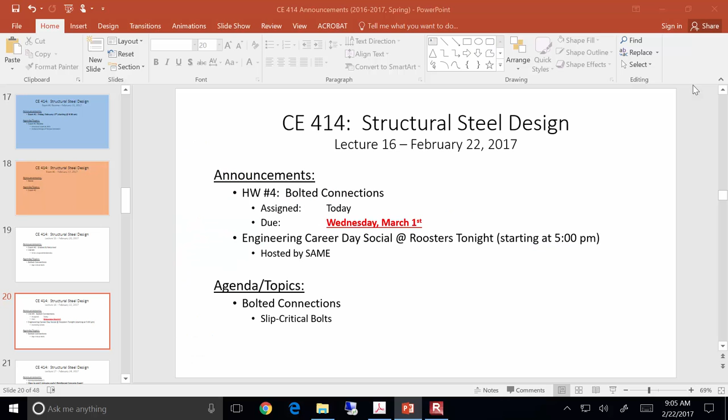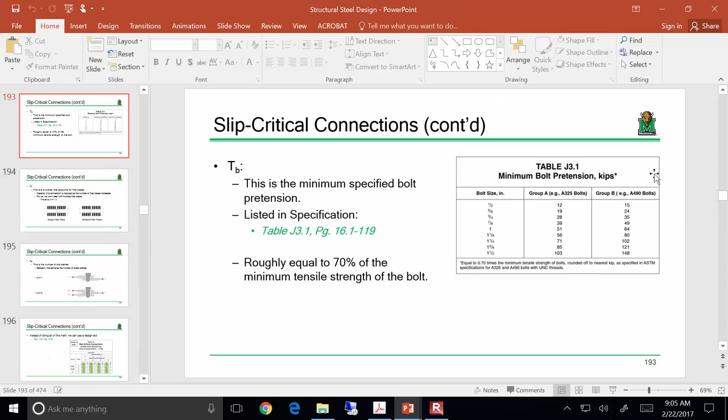All right. So there's 3 problems. One thing I will point out, we're going to do a slip critical design today, but we are not going to lay out the connection or analyze bolt bearing, because we've already done that. I'm not going to do the same thing like 3 times. So we're literally just going to do this slip critical design example very quickly, and then we'll move on from it. But let me go back to the notes, because there's a couple things I want to review before I pull up the homework assignment and get everybody acclimated back to what we were talking about.

So first thing, I'm going to hop back and forth a little bit, but I just want to bring it back to the topic at hand. We're talking about the slip critical capacity of bolts. We discussed that our nominal capacity is computed as follows. We have essentially our coefficient of static friction multiplied by our normal force. In this case, our coefficient of static friction is mu, and our normal force is T sub B. We take those 2 quantities, multiply them together, but then we adjust them by a number of different factors.

D sub U is our multiplier to account for the difference between the pretension that we're specifying versus the pretension we actually get in the field. And the fact is we get way more in the field, so much more that we can actually up our design capacity by about 13%. H sub F is our filler plate factor, and in essentially all cases we're going to do in this class, we're just going to take H sub F to equal 1, and N sub S is the number of slip planes.

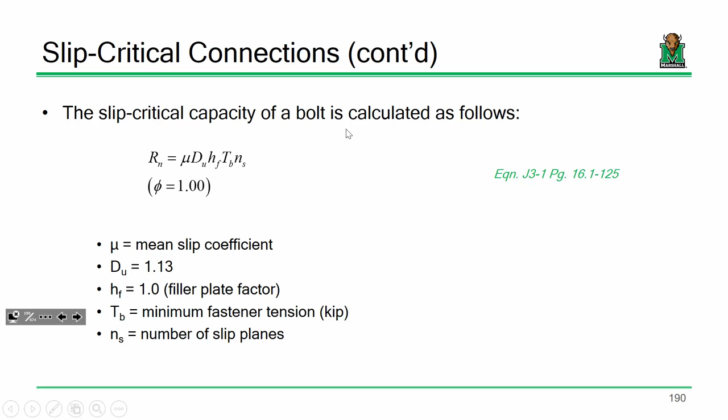Now, a couple things. So phi is 1, but a lot of this stuff I want you to understand, but you really don't need to employ, because if you skip ahead a little bit and go to the manual, and I think we looked at this last time, there's a nice, easy-to-use design guide in the manual that's right after the bolt shear table. If you've got that tab near the bolt shear table, it's literally right there. So I'm not telling you to tab this twice.

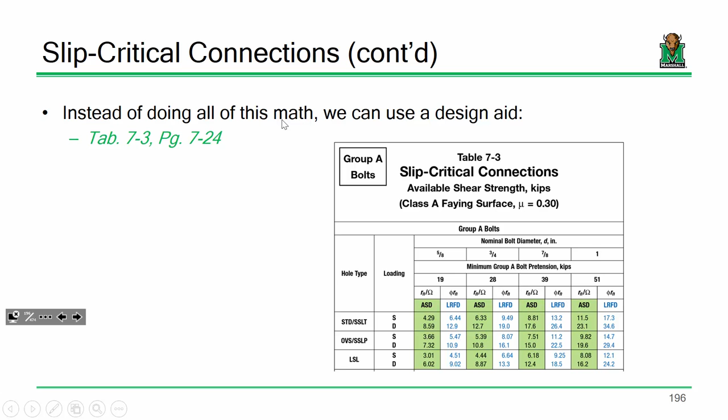Okay? Now, a couple things. Let's be clear on the design procedure for bolted connections in general. Like I said, I am hopping back and forth a little bit, but I want everybody going the right way.

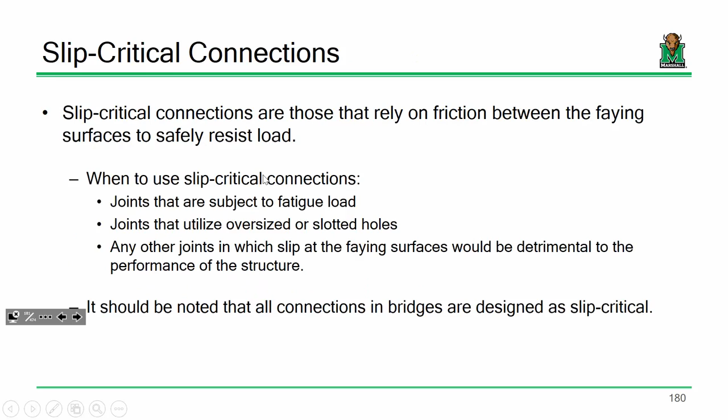Okay. I want to be clear on the bolted connection design procedure. What do we do? We start off with a factored load. We determine the capacity of a bolt, divide to obtain the number of bolts, and that's it. For bearing type connections, all we care about is the shear capacity of a bolt. But when we look at slip critical connections, we care about the shear capacity and the slip capacity of the bolt, and we just take the smaller one. In other words, which capacity is going to govern the design? It'll be the smaller one, either the shear capacity or the slip capacity.

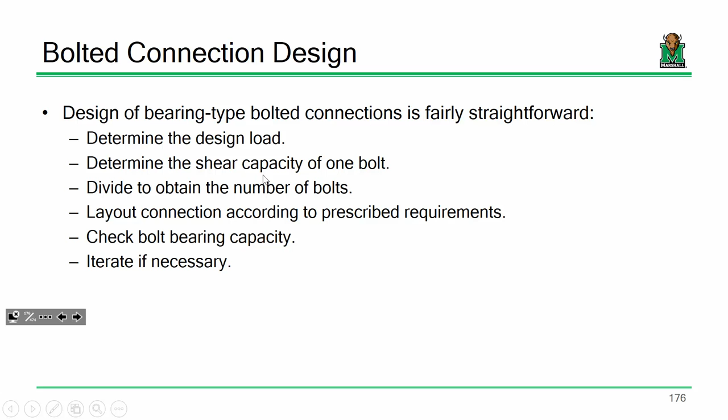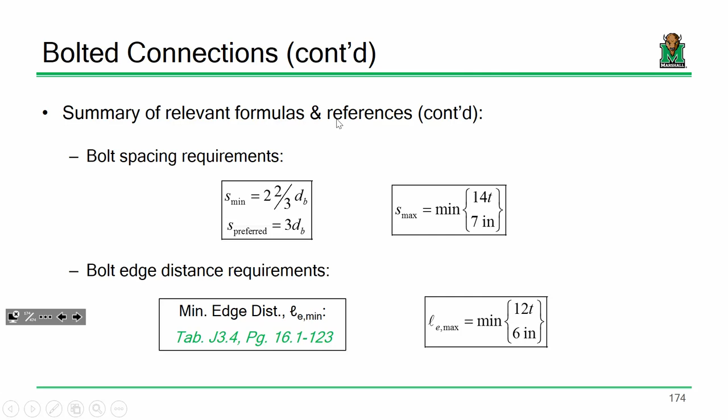Now, what we are not going to do today, but what I want you to be equipped and able to do is, number one, lay out the connection according to prescribed requirements. So make sure that you can follow this. You're going to space based off of preferred spacing and minimum edge distances. And make sure that you can calculate bolt bearing capacity, because you still need to do that. You can't do that at the onset because you have no idea what the connection looks like. Okay? Sound reasonable? Anybody have any questions?

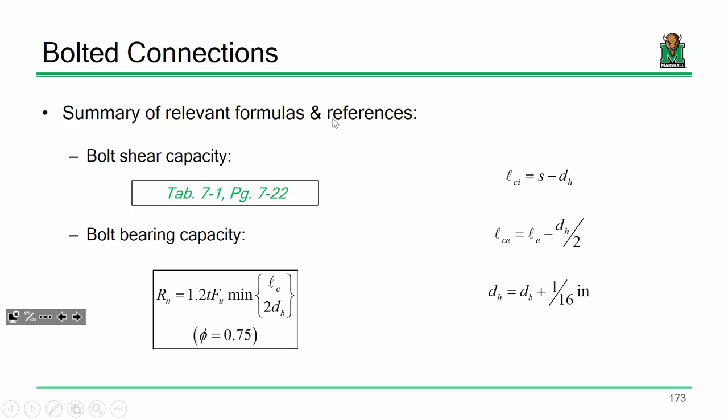All right, so what we're going to do is example 10, where we're going to determine the number of bolts in a slip critical connection. And this is going to be a very quick example. So I'm on slide 197. We're going to design this connection as slip critical. So we have group B bolts. Now, if I didn't tell you that the threads were included or excluded, what would you assume? Included, worst case scenario. So group B bolts with the threads included, 3/4 inch diameter.

We have A572 grade 50 steel. To be honest, the A572 grade 50 steel really doesn't matter for determining the number of bolts. The only time that matters is when you're going back and checking bolt bearing. Okay? Sound good? This is going to be a really quick example, and we'll just list what we need to do afterwards, because again, I don't want to do the same thing over and over again.

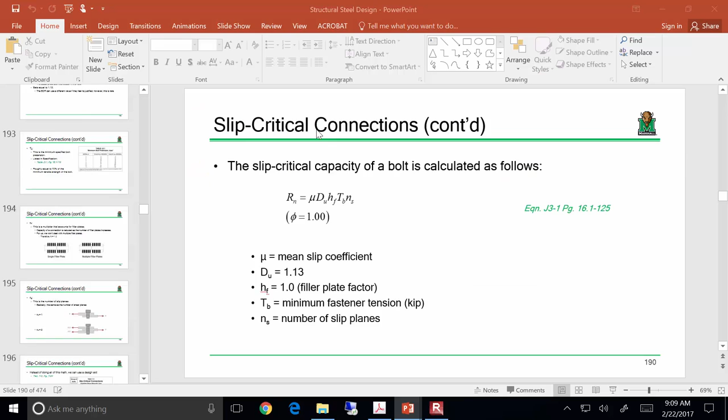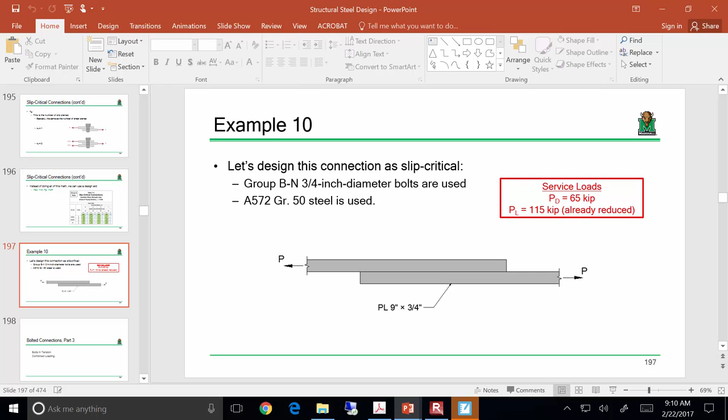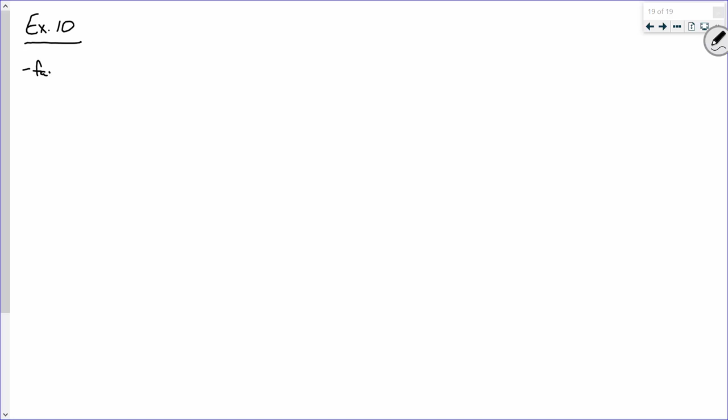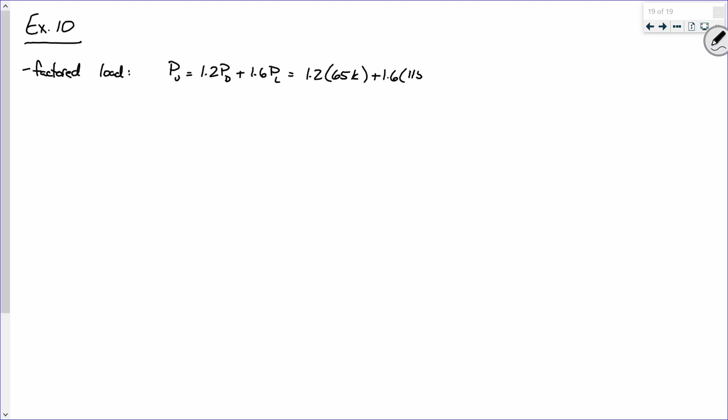All right. Okay, so let's look at example 10. What do you think the first thing we ought to do for example 10 is? Factor the loads. So we have a dead load of 65 kips, and a live load of 115. So the factored load: Pu is 1.2 P dead plus 1.6 P live, 1.2 times 65 plus 1.6 times 115. Plug and chug, that comes out to be 262. So that's the factored load.

Now, since this is a slip critical connection, we need to assess the shear capacity of a bolt and then the slip capacity of a bolt. So let's start off with bolt shear. We are in Table 7-1. Let's start recalling a few facts that we're going to need to look up the capacity of one of these bolts. First off, what's the diameter of these bolts? 3/4. So we've got a 3/4 inch diameter bolt. It's group B, and I told you it was threads included, but if you didn't know, you would assume group B with threads included.

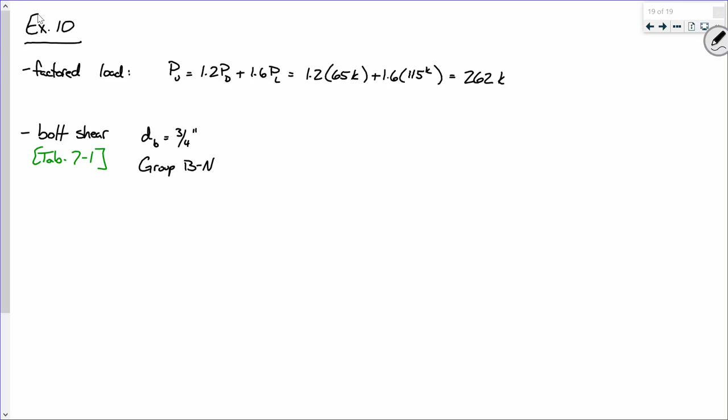Now help me out. Are we in a situation of single shear or double shear? Single. There we go. All right, single shear. Now based on these quantities, what is phi Rn? Remember, I draw that little n to say it's phi Rn of a bolt. 22.5.

All right, sound good? Okay, now literally just do this. Take this and turn the page. Okay? All right, so we're on bolt slip now.

Because we are designing a slip critical connection, we have to worry not only about the shear capacity of the bolt, but also the slip capacity. So let's look at slip, bolt slip. So this is table 7-3.

Okay? Now, let's look at a couple things. One of the things about this table is the faying surface. What class faying surface is it assuming? A, so a mu value of 0.3. Okay? Now we have class A faying surfaces with a mu value of 0.3 or class B with a mu value of 0.5. Now if you don't know, let's just think about this. What would be the most conservative to assume, a class A or a class B? Class A, because that's going to be a lower coefficient of static friction, and that's going to yield a lower capacity. Okay? Sound reasonable?

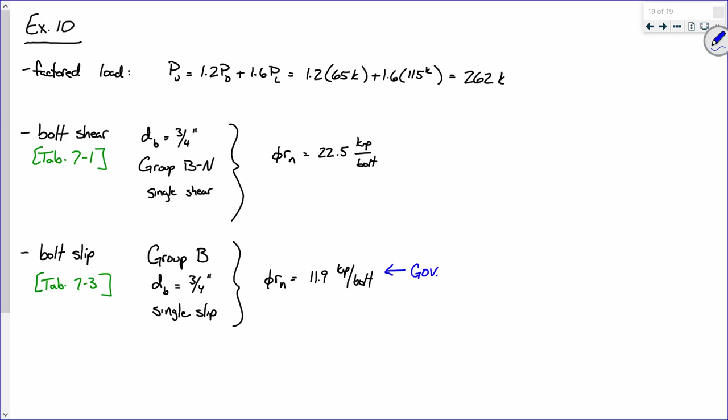Now, that might seem like a lot, and it is. One of the things about slip critical connections is that a rule of thumb is you're probably going to be using about twice as many bolts as you would in a regular bearing type connection. And that should make sense if you look at the numbers. I mean, the bolt shear capacity was what, 22.5? The bolt slip capacity is 11.9.

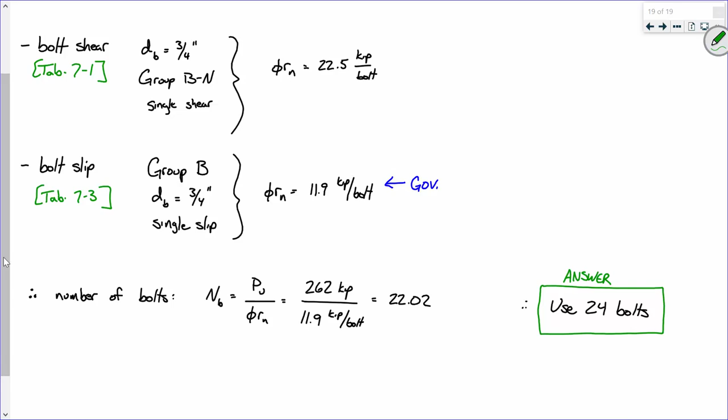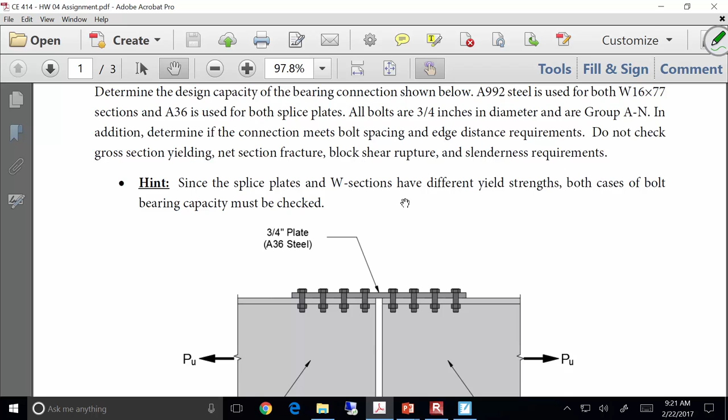All right. If that makes sense, I do want to at least pull something up on the homework assignment to kind of enhance some clarity of some things. So here's the homework assignment. Let me at least pull up problem 1 to kind of explain what's going on here. So with problem 1, you need to determine the capacity of the connection. Now, a couple things to make your life a little easier. So number 1, let's take a look at one of these splice plates. One of these splice plates has, what, 16 bolts? Like that's one splice plate. But when I'm looking at the connection and I'm trying to analyze it, I wouldn't consider that that splice plate has 16 bolts. I would only consider 8.

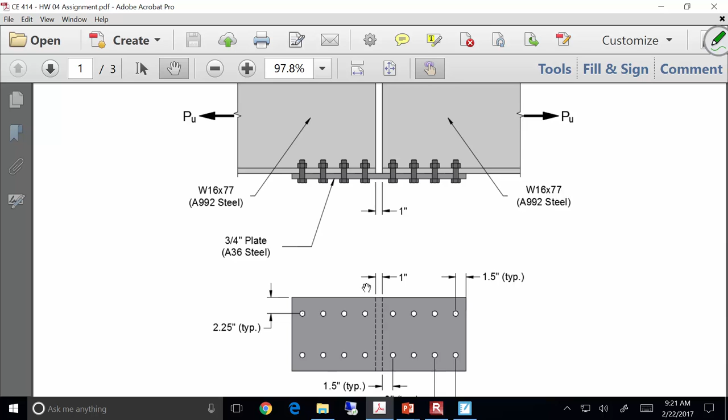Okay? The easiest way to go about performing this type of analysis is break out the old samurai sword or lightsaber, cut a section literally right through here, and then what you've got is on top you have a plate going like this, and down here you have a member going like that. And then you also have this as well. Remember I said that when you do a bolted connection analysis, you always have 2 cases of bolt bearing? Well, that is definitely the case here. Because if you look, I've got a W16x77 that's transmitting load this way, and then I've got 2 splice plates that are transmitting load this way.

Okay? So remember when we did bolt bearing, it's a function of your layout, and then your thickness, and then your steel, right? So if I look at the splice plates, I've got 3/4 inch and 3/4 inch of A36 steel going this way. But on the I-beam, I've got a W shape, a W16x77, so the thickness is going to be whatever the thickness of that flange is, and it's also A992 steel. So you just got to check both. Okay? So you're going to have 2 cases of bolt bearing with this one. Okay? Does that make sense? Did that make sense on that last example that we did where we had to go through and check the bolt bearing on both cases? Everybody remember that?

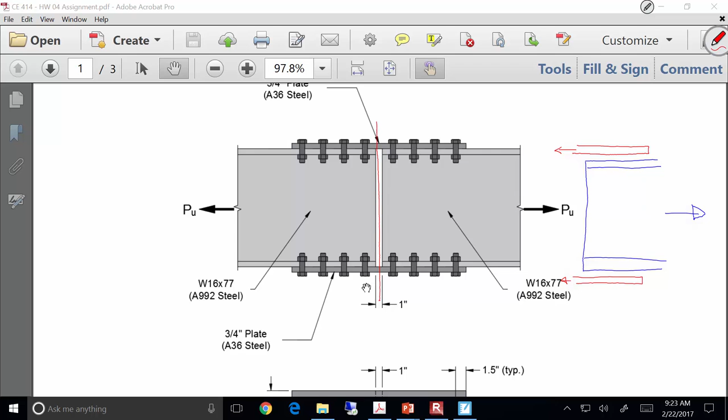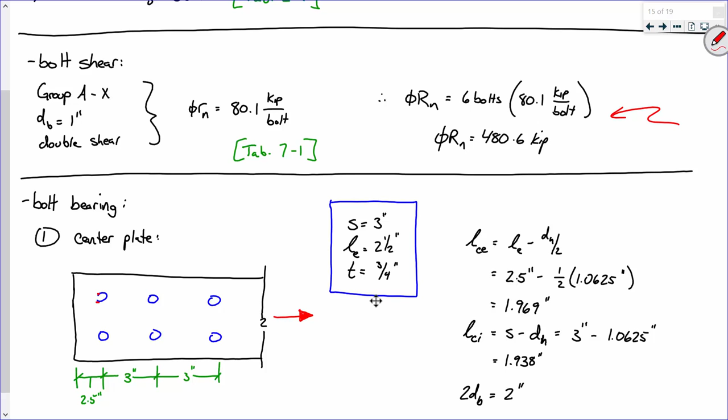Does everybody remember? I don't see many people shaking their head. Hold on, I'm talking about this. Remember when we looked up the shear capacity of a bolt, and then we had the bolt bearing, we had the center plate, so we looked up these dimensions right here, and then based on the spacing, the edge distance, and the thickness, we said, all right, we can calculate our clear distances, calculate our edge capacity and an interior capacity, and then compute ϕRn.

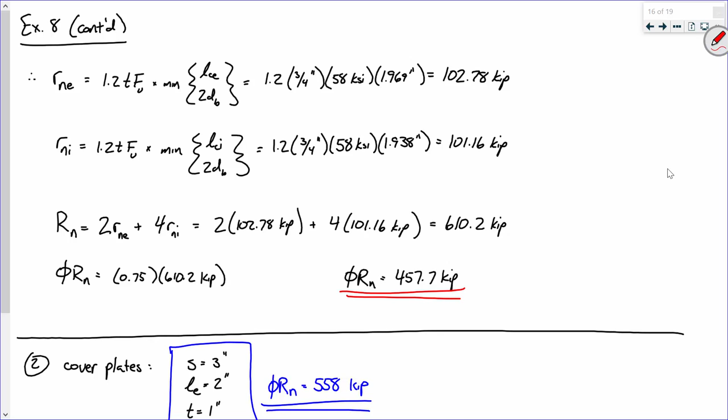But that was just one case of bolt bearing. We needed to do it again because we had the cover plates. And remember I said let's just use 2 times the thickness and then edge distance and spacing and go to work. Does that make sense?

Everybody okay with that? I'm going through this now because I've given similar problems before, and what I end up finding is that the students aren't checking enough cases, or they're literally just doing verbatim exactly what we did in class and then stopping. I did this one in class, I analyzed it, but I didn't do it on example 9, and I didn't do it on example 10, because it's literally the same procedure. Does that make sense? Everybody all right on that?

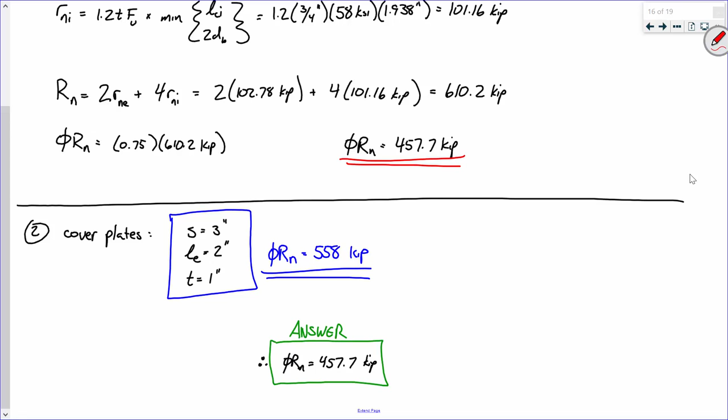Okay. Now that's problem 1. Problem 2 is a connection design.

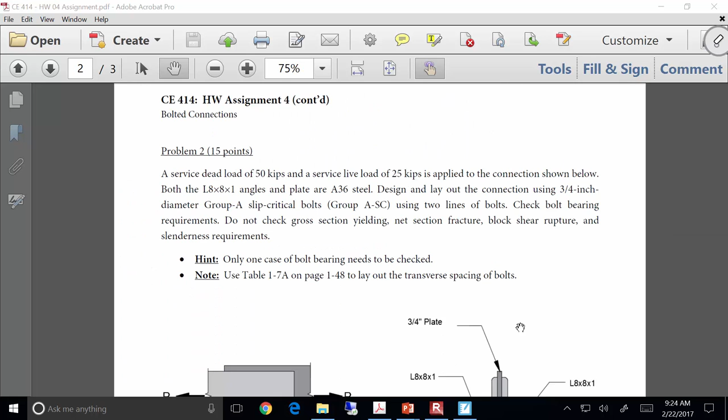Okay, problem 2 is a connection design, but a couple things about this. Number 1, this is a slip critical connection, so you've got to check bolt shear and bolt slip just like we did this time to design the connection. You also have to lay it out. As for laying out the connection, I want you to use 2 lines of bolts.

So for instance, if the answer is 8 bolts, you're going to have something like 1, 2, 3, 4, 1, 2, 3, 4, like 2 lines of bolts. Now you can use spacing and edge distance requirements to lay the bolts out in this fashion. As for laying them out this way, use table 1-7A on page 1-48, and there's a nice little gauge spacing table on the bottom of the sheet.

As for bolt bearing, you really only need to check 1 case, because if you look, you have 2 angles that are 1 inch thick, but you have a plate in the middle that's only 3/4. So which one do you think matters? The 3/4, the one in the middle. Make sense? And it's all the same steel, so it's an easy pick. All right? Sound good?

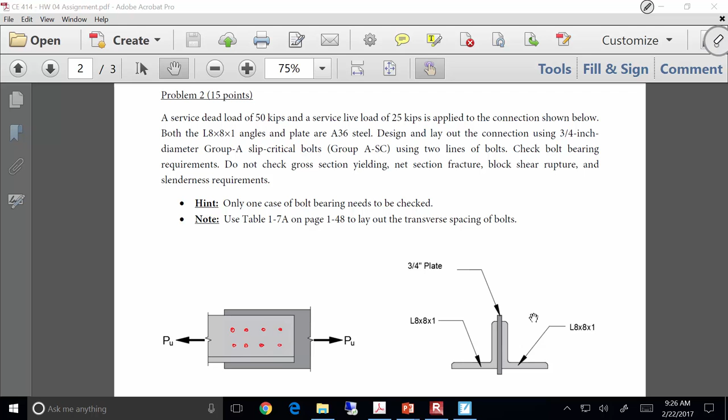Now, the only one that you haven't done yet, which is what we're going to talk about now, is this one. This is a little different. This is unique. This is a combined loading problem, and that takes a little bit of discussion.

Is everybody good so far? Anybody got any questions? Yes, I do.

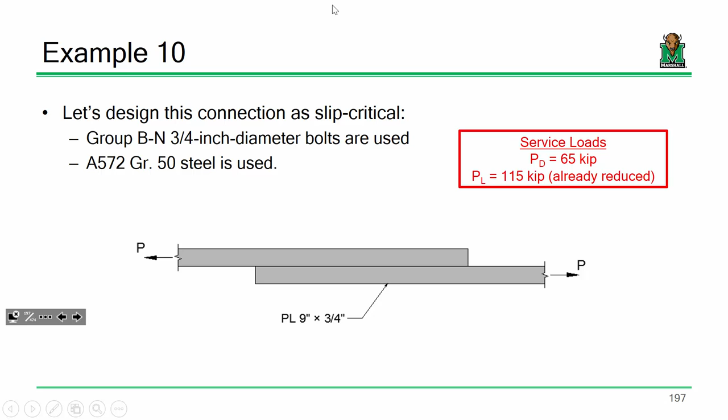Okay, now then let's talk a little bit about bolts in tension, and let's talk about combined loading. So let me explain what I mean when I'm saying bolts in tension and what I mean by combined loading, because this is kind of important.

They happen in a number of different cases. They happen in steel design, they happen in concrete design, and we're going to talk about different instances of them throughout the semester. But in order to discuss combined loading, we have to discuss each individual component. So the idea is if you have a section that's in combined loading, let's say you have a bolt that's in shear and in tension, you have three checks. Check the bolts in shear, check the bolts in tension, and then check the interaction between the two. So we got to handle each one at a time.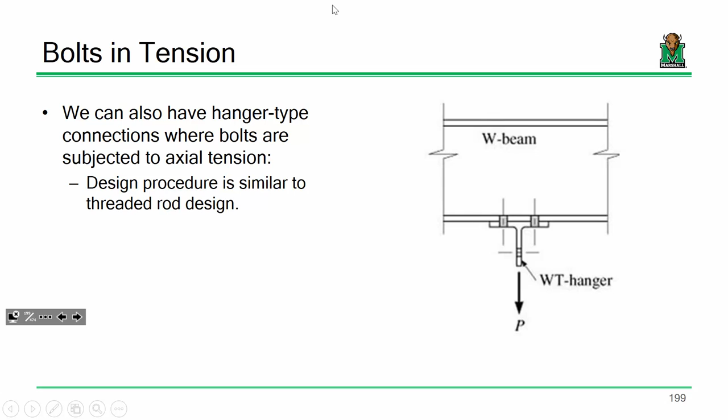Now, if we were talking about a pure connection that has a bolt in tension, we're probably talking about something like this. So if you've got some sort of hanger-type connection, let's say you got a W-beam, you got a WT, and you've got a load hanging off of it, those bolts connecting that hanger to the I-beam or to the wide flange, they'd be experiencing pure tension, am I right? So the design of bolts in tension is pretty simple because, first off, the bolt in tension and a threaded rod are designed essentially in the same fashion. First off, the equation is exactly the same, okay? That's number one. Number two, the actual conceptual aspects of a bolt in tension get a lot simpler.

I missed something? Or I thought there was a joke. I like to be included in the joke sometimes. Everybody's smiling. What's up? Happy to be here. Okay, all right.

When we talk about bolts in tension, there's a couple things that make our life a little easier. So number one, it doesn't really matter whether or not the threads are included in the shear plane, because there is no shear plane. We're not talking about shear, we're talking about tension, so it doesn't matter. Okay, so that's point one. It also doesn't matter how many shear planes there are. It doesn't matter if there's single shear, double shear, triple shear. There's no shear, it's just tension. So literally nominal stress times an area, there you go.

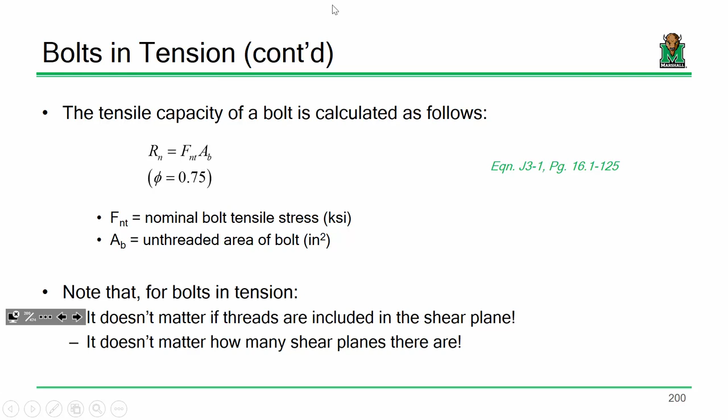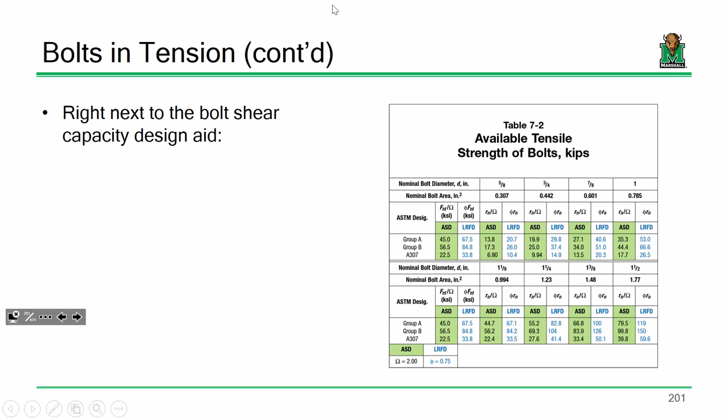Okay. We also don't need to even do much math because look at the table right next to 7-1. Look at table 7-2. It's literally right there, the available tensile strength of a bolt. Diameter, group, there you go. It's incredibly simple, okay? Good? All right, so looking that up is pretty easy. What is an issue is if you've got combined loading.

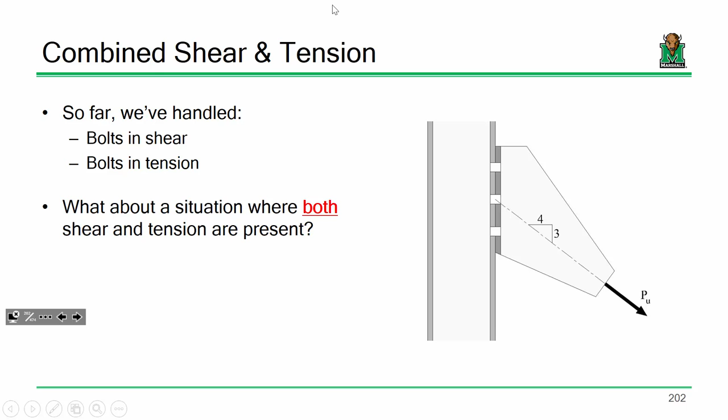So first off, does everybody agree that we've got two stresses on those bolts? We got shear stress and we got tension stress. Everybody okay with that? All right, so if you've got both, we handle the bolt capacity in shear, we handle the bolt capacity in tension, and then we handle the interaction. Now, interaction is a unique concept. The idea is this. If I have a bolt that's experiencing something like that, that diagonal loading, okay, it really wouldn't make sense.

I'm going to try and state this as clearly as I can, but let's look at it like this. If I'm loading it in shear, I would expect that I can load it in shear until I reach 100% of its shear capacity, and then it's going to fail. Sound reasonable? If I load it in tension, I can expect I can load it until I reach 100% of its tensile capacity. Sound good? But if I got shear and tension going on at the same time, it really wouldn't be reasonable to expect that I could reach 100% of the shear capacity and 100% of the tensile capacity. The fact that you've got two loads going on at the same time would serve to weaken it a little bit.

Maybe if you've got shear and tension, maybe I can only reach about 70% of the tensile stress and 70% of the shear stress or something like that. Does that idea kind of make sense? The fact that you've got multiple things going on, you can't quite reach 100% of each component. You know, the presence of one is going to reduce the capacity of another. That kind of makes sense?

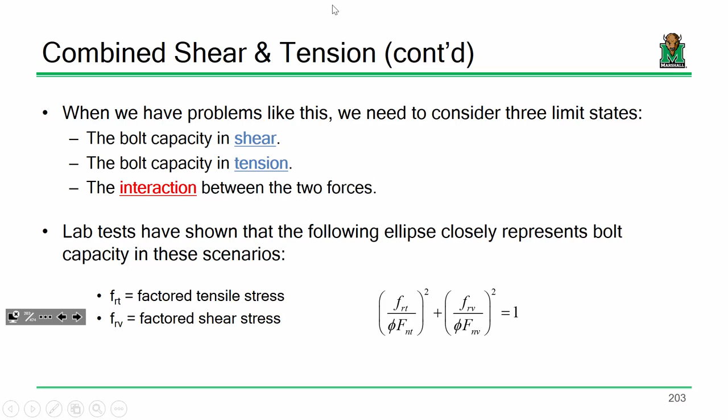Everybody okay with that? So, first off, if you go down to the lab and do some tests on a bunch of bolts, you'll find that the behavior really closely represents the following elliptical relationship. So, for instance, if I've got the bolts loaded up to about, let's say, 50% of their shear capacity, I can only expect about, maybe 80% of their tensile capacity. Does that idea kind of make sense? And if I get more shear stress, all the way over here, well, that tensile capacity drops even further.

Sound good? Now, the problem with that relationship is the equation of an ellipse requires a lot of math. And engineers don't like math. They like to keep things simple, am I right? You're like, engineers don't like math. Why did I get into this field, right?

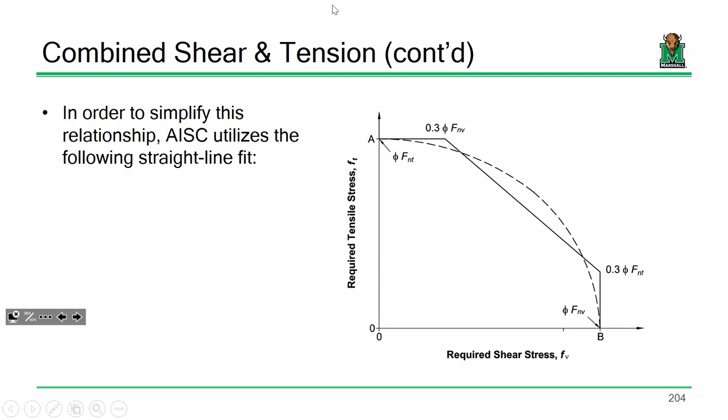That makes sense? Okay. Now, y equals mx plus b. x is what's going on this axis, and that's the shear stress, right? Well, there's x. So this term right here, Fnt over phi Fnv, that's the slope. And it's negative, which means the line's going down. Make sense? All right. Sound good? Now, f_rv is the applied shear stress, which I'll talk about here.

If you go to the code and you open up Chapter J and look at the equation, you'll see a user note below the equation for FNT prime, and it says, note that when the required stress, either in shear or tension, is less than or equal to 30% of the corresponding available stress, the effects of interaction or combined stress don't need to be investigated. So this is the code's way of saying if one value is so significantly larger than the other, don't worry about the interacted effect. Okay?

Now, another thing, if you look at the equation, it's another one of those, the capacity equals a pile of junk such that it's less than or equal to another pile of junk. So that's where we're going off the minimum.

Yes, sir. It's accurate enough. I was really being a little facetious there, but this is close enough. I was just being silly. This is close enough for government work. So, all right.

All right. Okay, this slide right here, it doesn't have a lot on it, but it's really important, okay? And I really want this to be very clear. Let's look at the capacity again. The capacity, what does it say? It says the nominal capacity is FNT prime times AB. So what we are doing is we are computing a modified tensile capacity. When we calculate phi RN, we compare it to the tensile load, okay?

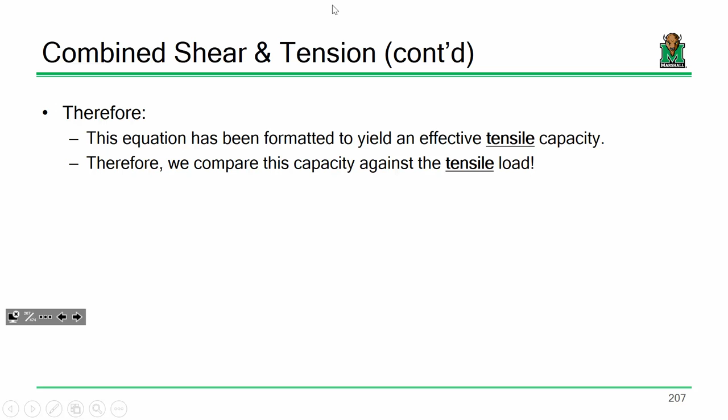Yes, sir? When we're looking at the tension capacity, do we consider the preloaded bolt, say if we're doing slip critical connections? That's a good question. So the question was, if you've got a slip critical scenario, do you need to consider preloaded? Two answers. Number one, yes, but not in the way you're talking about. If you go to Chapter J, in fact, let's everybody take a look at this. So 16.1-125.

So I'm on 16.1-125. Does everybody see the equation that we're talking about right here? Okay, so this is where this particular equation is in the code. So your question was, do we need to consider that additional effect for slip critical? The answer is yes, but not in the way you're talking about. If you turn the page to 16.1-127 and you look at item number 9, see where it says combined tension and shear and slip critical connections? You essentially compute the modified tensile capacity, but there's an adjustment factor that you incorporate to account for that preloaded tension that you're talking about.

So the answer is yes, but it's sort of incorporated on the capacity side, not the load side. Does that make sense? That's a really good question, though, the fact that there's already tension in the bolt, so do we need to consider that? And I'm not going to do that for you on an exam, though. I'm really just interested in you understanding interaction in general. All right, that's a good question. Anybody else? This is good stuff.

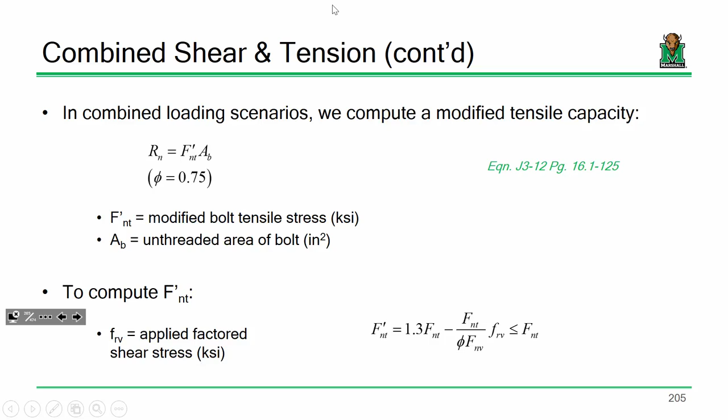Let's see if we can at least get this next example started. We'll try and knock some of it out, and we will probably finish it on Friday. So here's the example. We're going to analyze this connection. I'm just going to be absolutely frank. The W14 by 90 and the WT 10.5 by 31, they really don't matter. I'm not interested in really checking bolt bearing for this problem. I'm really only interested in the group of bolts. Now, I am curious, how many bolts do you think are in this connection?

4. This is a WT, right? So this is the flange, and this is the web sticking out of it. So there's 2 bolts on this side, and then there's going to be 2 bolts on the other side. So there's a total of 4 bolts. Does that sound good? Now we're also on a 3 to 4 slope ratio, so this PU, we can split that up into X and Y components. Yes, sir?

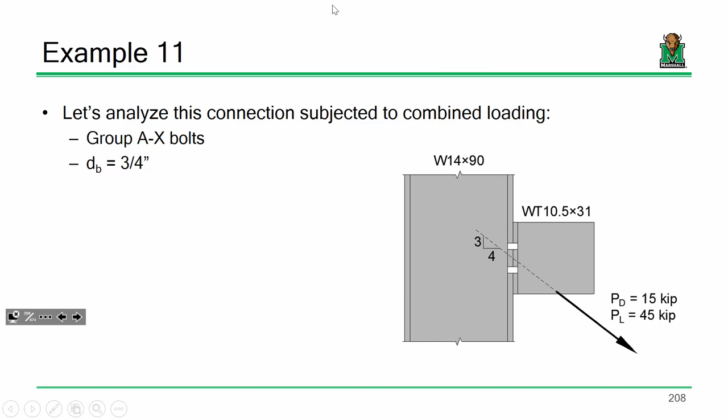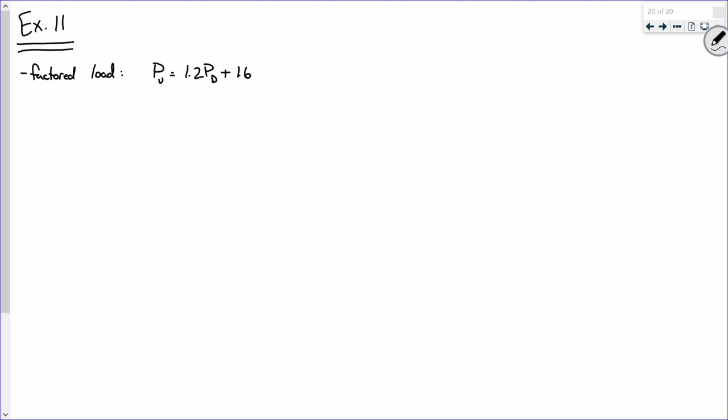Okay, so this is example 11. First off, let's start off by factoring the load. Let's just go ahead and do that. So PU is 1.2 P dead plus 1.6 P live. 1.2 times, what's the dead load? Plus 1.6 times, what does that come out to be? 90.

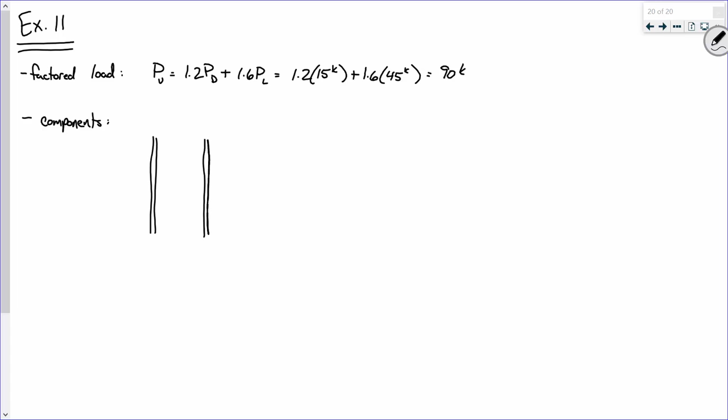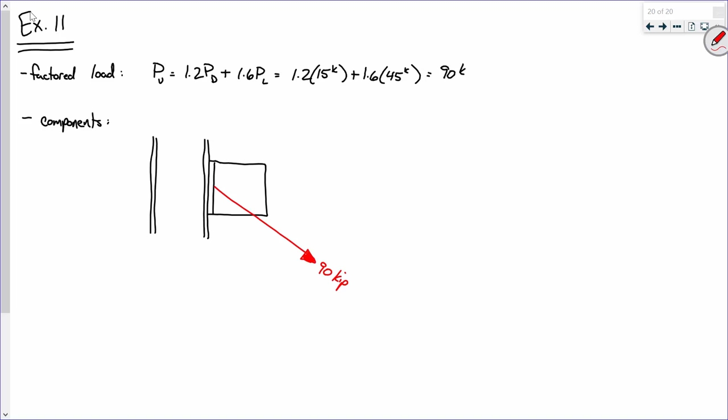Okay. Now, as for the tension and shear components, let's make sure we're clear on what's going on. So I've got a column, I've got a bracket, and I have a load going through that bracket and that series of bolts that looks something about like this, and you're telling me that's 90 kips, right? Okay, and my bolts are sort of like that and like that. Okay, now, help me out. Let's see, this one was 3 and that one was 4. Is that right?

Okay. So let's take a look at this. I propose that what we need to do is this. We have a factored load, right? Now that load is on an incline. So what we need to find is the factored tension component and the factored shear component. Sound good? So help me out. All right, let's split this up into X and Y. So the X component I propose is 4/5 of 90, and the Y component is 3/5 of 90. Sound good? The X component, the 4/5, is that tension or shear? Tension. There we go. So I propose 4/5 of PU is our tension component. And then this is 3/5.

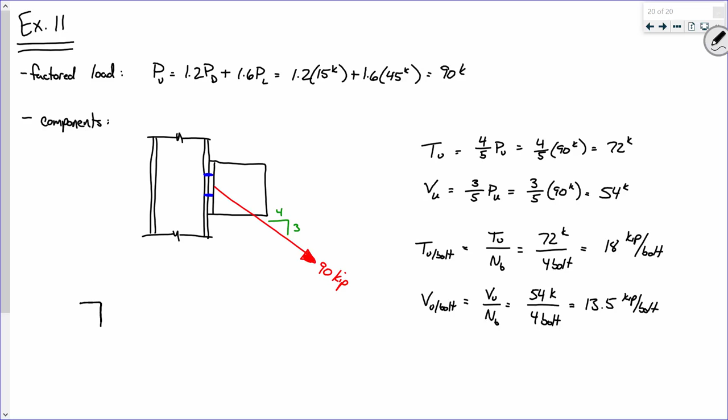I will say that when you have elements in tension, there is an effect called prying action where you can have a T shape. Let's keep it simple. Let's say you got an angle and you've got a plate right here and you've got a bolt sticking through it and you load. What can happen is you can actually start to fail the angle, and it kind of does like that whole thing. I'm not a good artist, but you see what I mean? The angle is sort of bending, or sort of failing and bending. And that effect is called prying action. It's really plug and chug, and we might talk about it later, but right now I just want to focus on the interaction. Because that's going to become important for other topics later, like beams and columns and stuff like that. Sound good? Any other quick questions?

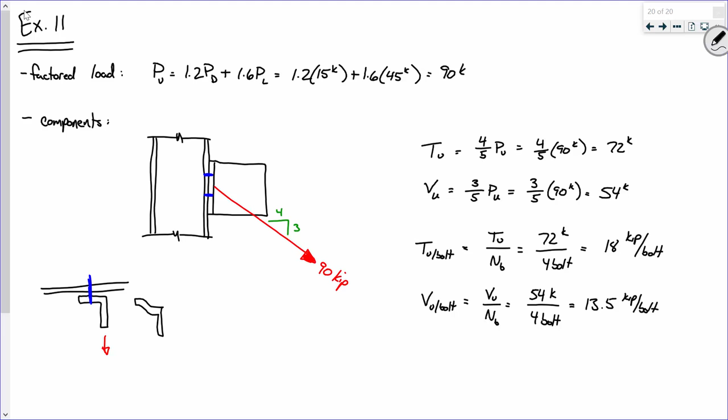All right. One final point before we leave, and I don't want to get too unpleasant, but do me a favor and try and start showing up on time. It was like 1 minute before class, and we had like 8 people here. Now, we had a rush coming in right at 9, which I'm not too worried about, but do try and be on time. So that's all I got. We'll see you.